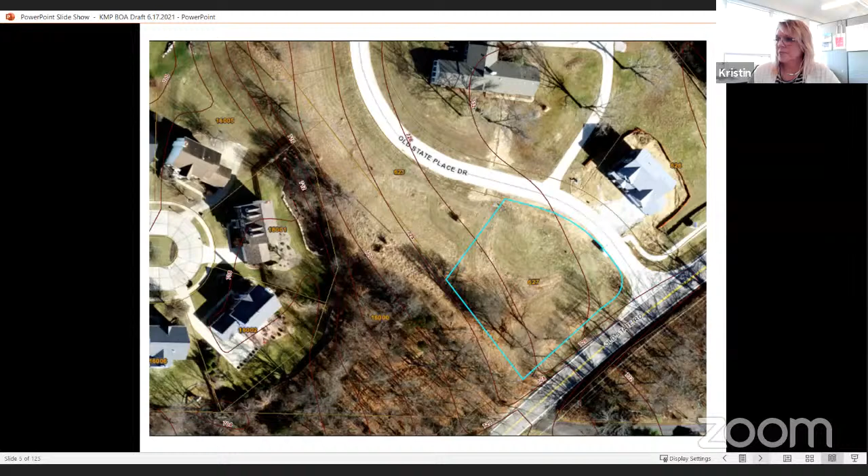This is the front of the home being constructed. I'm standing here on Old State Place Drive, looking straight at the home. And again, I'm standing on Old State Place Drive, looking to the left of the home, right here. This is Old State Road right down here. And I am standing over on the left side of the home, moved over a little bit, looking at the left side of the home, looking more into the back.

Here I am on the back side of the home. This is the rear of the home being constructed, and this is the natural resource protection area back here where the petitioners are requesting the fence.

Here I'm standing in the street looking to the right of the home, and over here is that common ground area I had mentioned before. I'm standing over in that right side area, looking at the right side of the home with the backyard area over here.

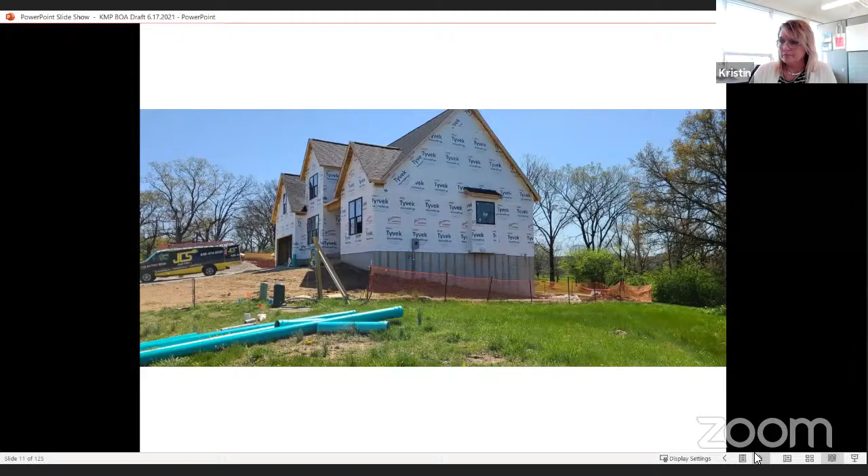A little bit closer to that backyard area on the right-hand side. The natural resource protection area is back in here. Just a little bit closer view of that backyard. Old State Road is back behind there.

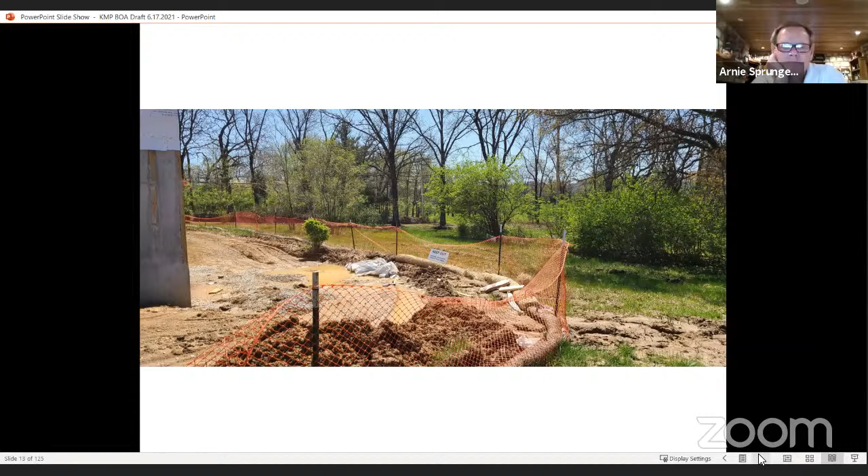This is the neighbor's home directly across the street. This is the entrance to Old State Place subdivision. So here is the subdivision street, and over to the right of that is Old State Road.

Now I am across on the opposite side of Old State Road, looking at the petitioner's home. So this is the left side of the home and the rear yard area back here. Again, I am across Old State, looking at the entrance to the subdivision. Petitioner's home on the left.

I'm standing in front of the petitioner's home, and this is looking into the subdivision street there. Standing in the same spot, the petitioner's home is over here to the right, and this is facing Old State Road. So again, this is the entrance to the subdivision.

This is standing at that entrance again, and this is looking down Old State Road here. Petitioner's home would be over here on the right.

Here's a description of the proposed fence. It's 54-inch aluminum black fence.

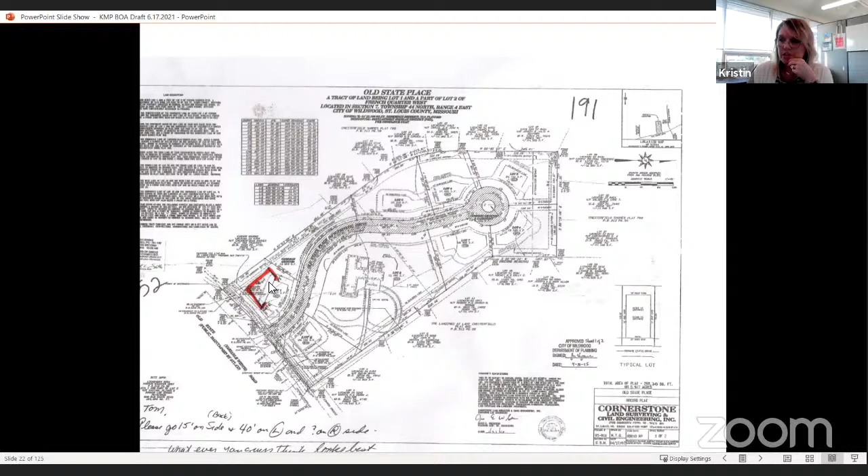And here is the subdivision right here. The petitioner's home is over here with that proposed fence area.

Again, a little bit closer view. This blue line is the property line around the fence, or around the property. Pink right here is the home that's under construction. This little green line is the natural resource protection area. So this area back here is that protected area. And this is the proposed fence right here.

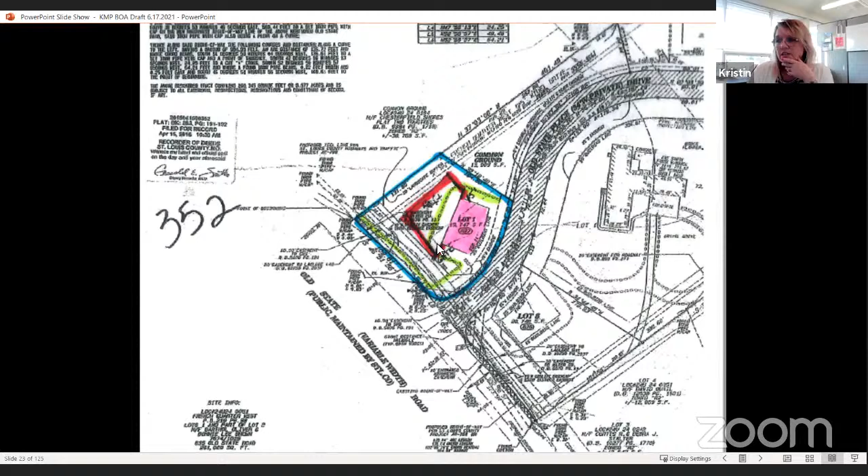The department would be happy to answer any questions you may have.

I have a question. Yeah, Kristen, so the area where the fence is going to go, and I tried to get that from the pictures. Good job, by the way, on the pictures. Thank you. Is most of the area that would be in the fence just pretty much grass?

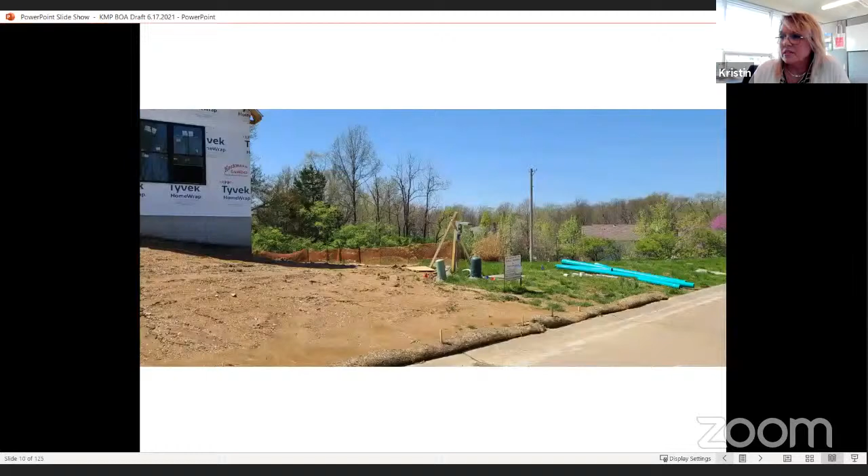It is grassy. Let me go back. This part right here is grassy, and this is where they're building right now. So I believe the stumps will have grass, and then the perimeter outside of the fence will be the trees and bushes that they have proposed.

And the topography, it looks like, is, I mean, it's not perfectly flat, but it's not a real aggressive slope, is it? No. Okay, thank you. You're welcome.

Madam Chair, before having Carrie Stump present their proposal, I do want to note that this particular request was heard by the board at its April 2021 meeting and was postponed with the request from the members to submit a landscape plan for this purpose. And so you do now have a landscape plan per your request. Thank you.

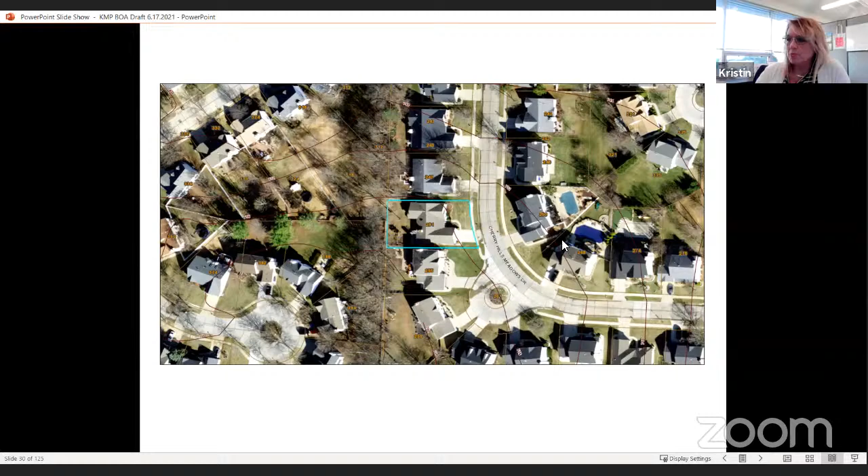This is showing the elevation. The lot is generally flat. There's a very tiny slope on the right side of the property. Here's the front of the petitioner's home.

Over here is the home on the left of petitioner's home. This is looking from the sidewalk in this space between petitioner and the house on the left. You can see the little stake here showing a property line.

This is walking up to that little fence right here with a gate, looking into the backyard. It's a little bit closer, seeing a patio, a basketball hoop, and part of this backyard. It's even a little bit closer with the landscaping. There is a fence over here on this side.

This is the property to the right of the Tuoths. I'm on the sidewalk looking in between the Tuoths and the property to the right. There's another little stake showing the property line.

And I have now walked up to the backyard. So I am on this right side of the home, looking into the backyard. See, it's generally flat. There's a tiny little slope here.

This area back here that is not fenced is not the Tuoths' land back there.

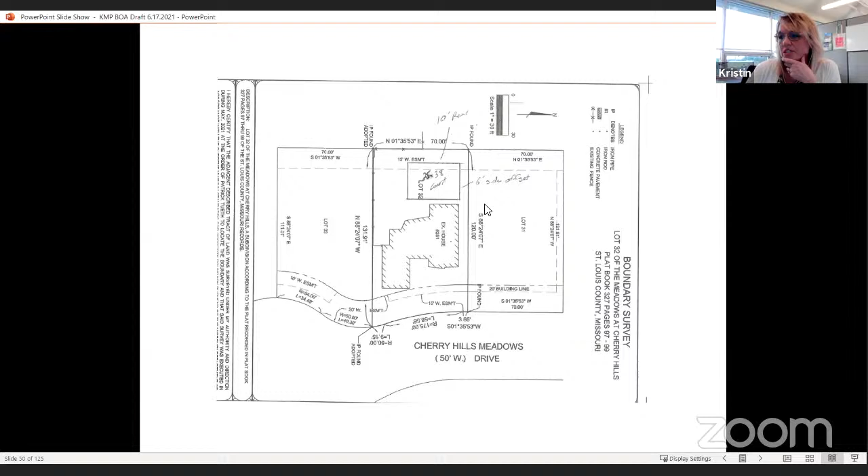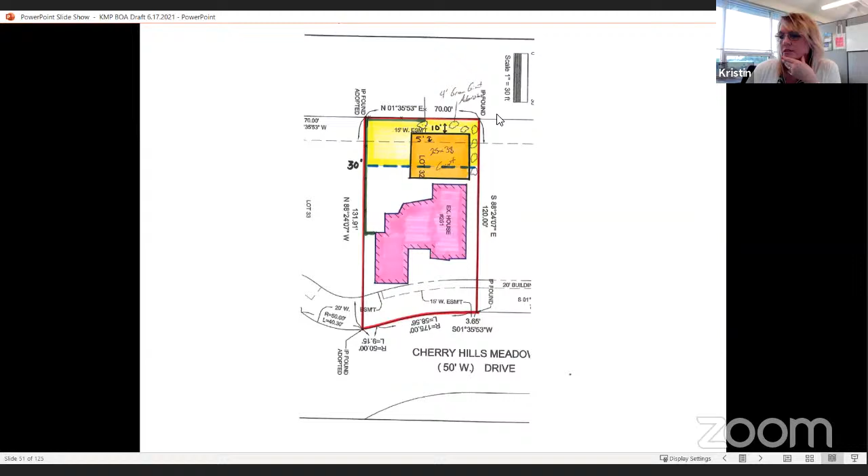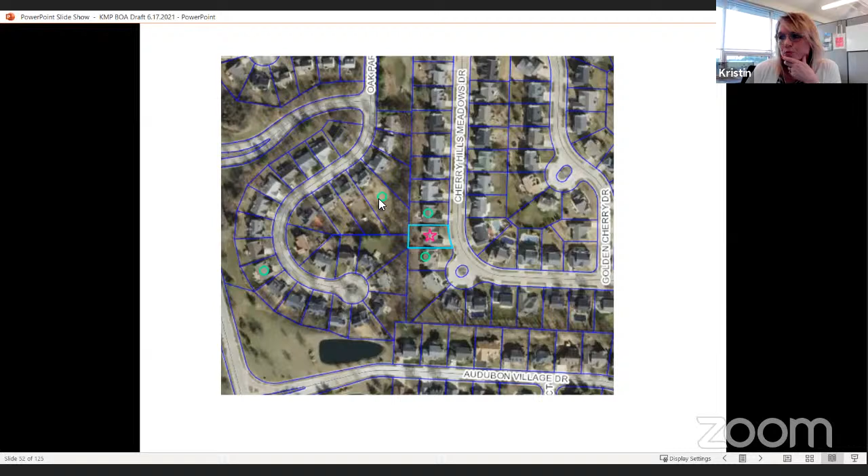These are the comments we've received. This is the petitioner's home here. We did have 3 support comments, none that were not in support. The department would be happy to answer any questions you may have.

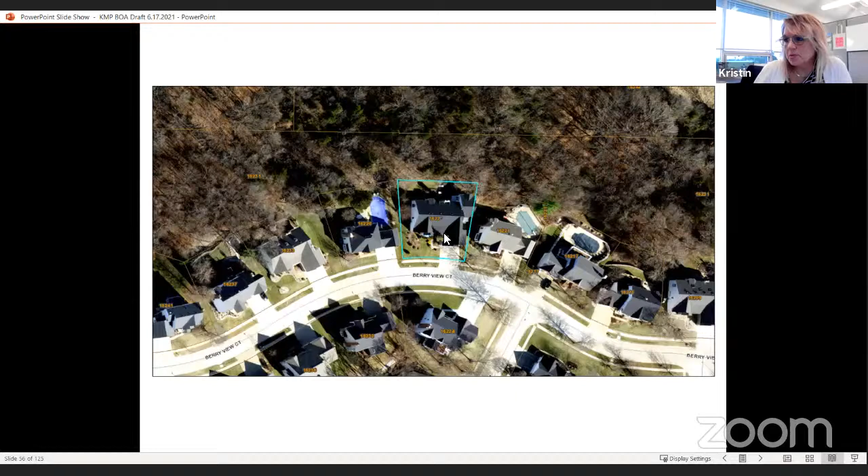Here's the property on Berry View Court. It's a single family home. There is common ground back here to the rear of the property, and the lot is a little bit over 11,300 square feet. And here is the elevation. The home is at the highest point of the lot, and this backyard does slope down back here towards the rear.

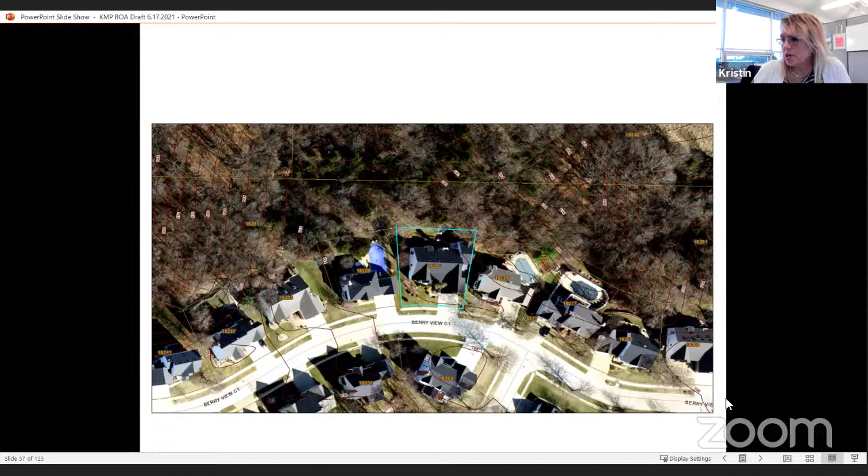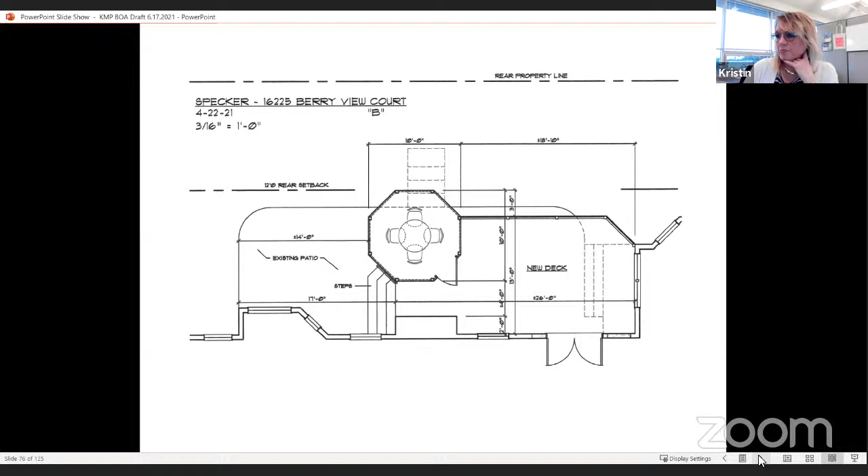And here's the drawing for that new deck and the pavilion here. The existing patio is staying with some steps here. This is showing the existing home and where the deck and pavilion will be placed, necessitating the variance for this area here.

You will note that part of the home is already in that area, because the original rear setback was 15 feet under the original plat with St. Louis County.

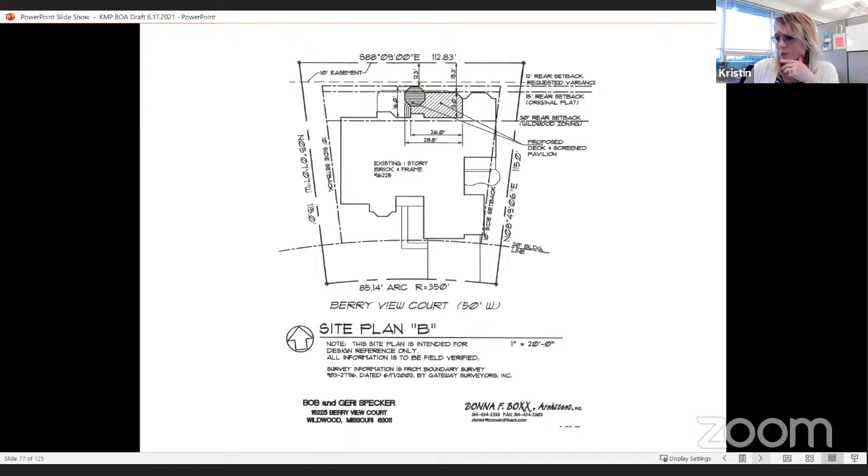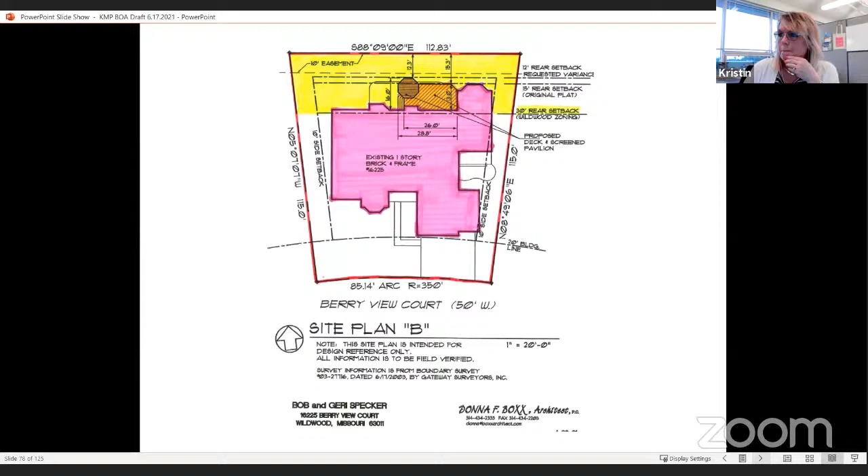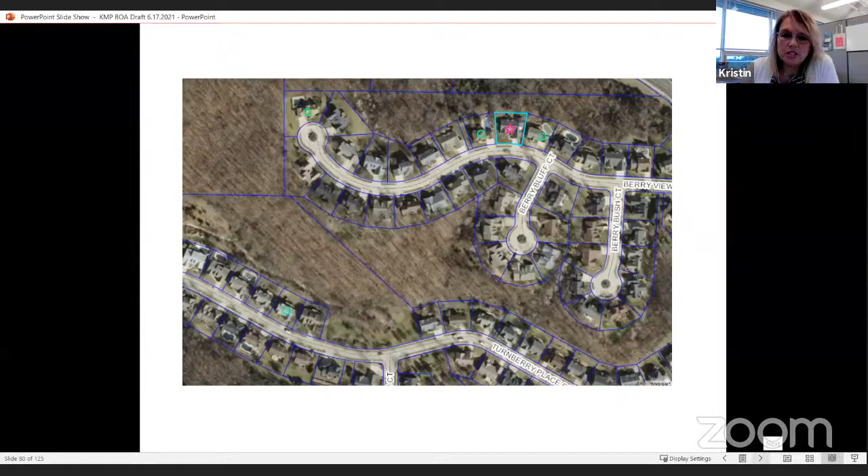We've had 3 comments. This is petitioner's home. The 3 comments were in support. We did not receive any comments not in support. The department would be happy to answer any questions you may have.

Thank you, Ms. Parker. Are there any questions for the Department of Planning at this time?

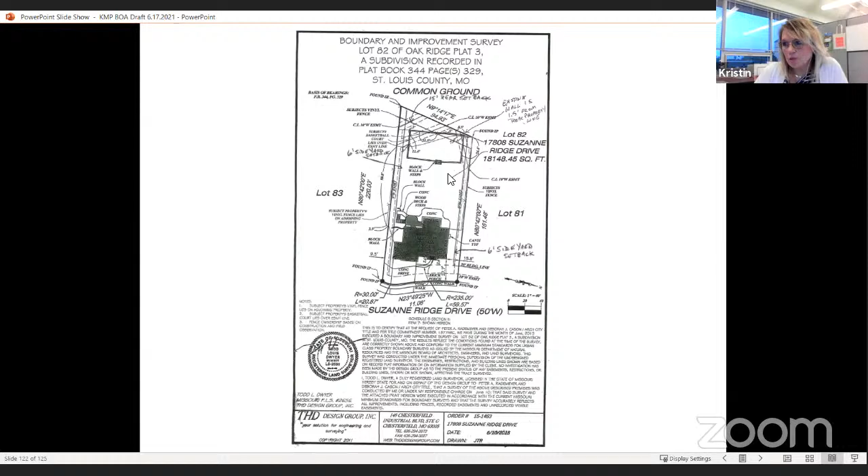And here shows the petitioner's property, with the property line outlined in red. The purple is the fencing around the property. The dark blue area is the home, and the green area here is the sport court. We see that the setback is right here, and this existing wall is 1.5 feet from the property line.

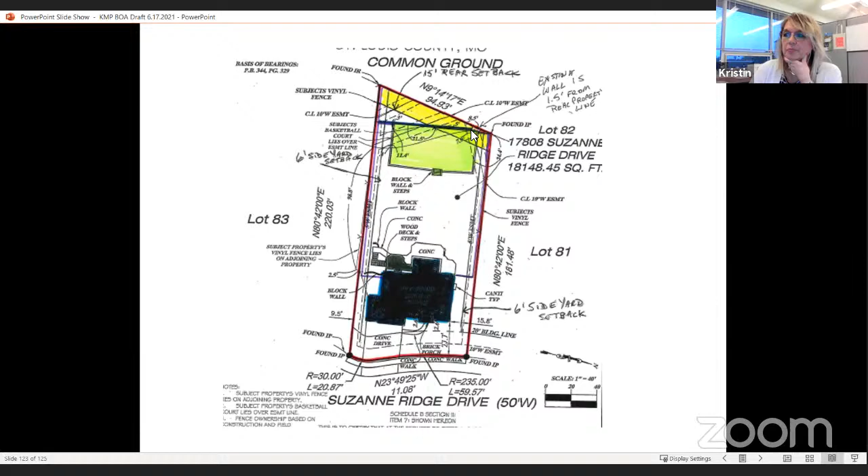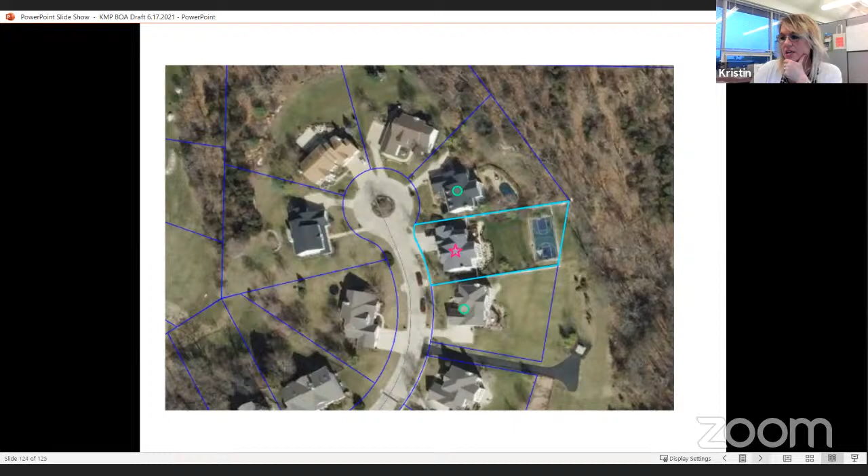We did receive 2 comments, from petitioner's home, both in support that we received. We did not receive any not in support. The department would be happy to answer any questions you may have.